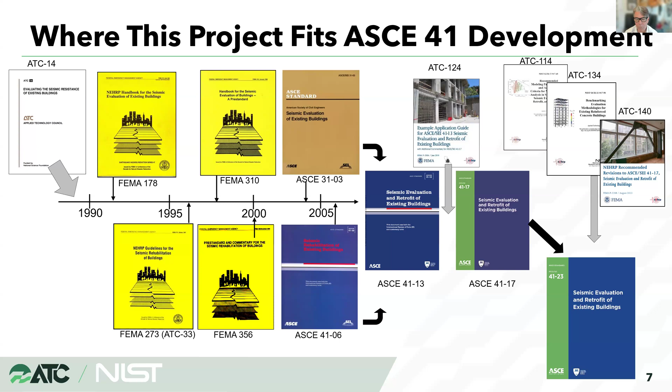I wanted to say that really NIST or FEMA, they don't tell ASCE 41 that you need to use our research information. They just set the table by doing paid research to develop information that can be considered in the standards development.

I'm going to move as quickly as possible to make it in time and leave some time for questions, but I wanted to highlight that what I'll be describing has been summarized very well in the August 2023 Earthquake Spectra, where we had two articles, one of which, on the nonlinear results, was picked for Editor's Choice in that publication. If possible, I'd like for you to look for those EERI Spectra papers, because what I'll be summarizing very quickly today is covered quite nicely in those two documents.

Outline for today: we'll talk a little about how we picked the buildings we were going to look at and how we were going to analyze them, what our approach was, and general observations. Then we'll talk specifically about the nonlinear analysis provisions, then on to linear analysis, and then conclusions and recommendations for future work.

We looked at various assessment procedures, including FEMA P-58, FEMA P-2018, which looks at the collapse probability of concrete buildings, Eurocode to some extent, and the New Zealand guidelines. But our main focus was really on ASCE 41. So while we did look at those other documents and methodologies and have information in our document on those studies, we won't be focusing on that today, again because our main focus was on ASCE 41.

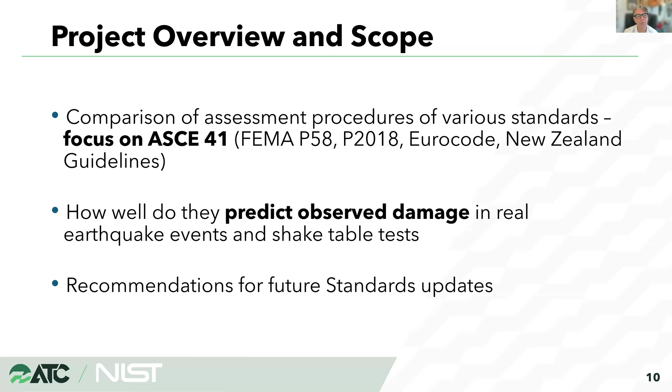The contract had some requirements for what types of buildings we were going to look at. We were only looking at reinforced concrete structures. At least two of those buildings needed to be from the United States. At least two buildings had to be frame buildings, one of which from the US prior to 1980 to cover non-ductile detailing. At least two shear wall buildings, one from the US prior to 1980 as well.

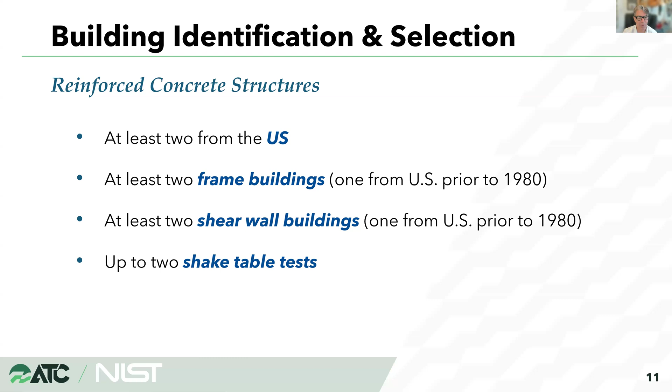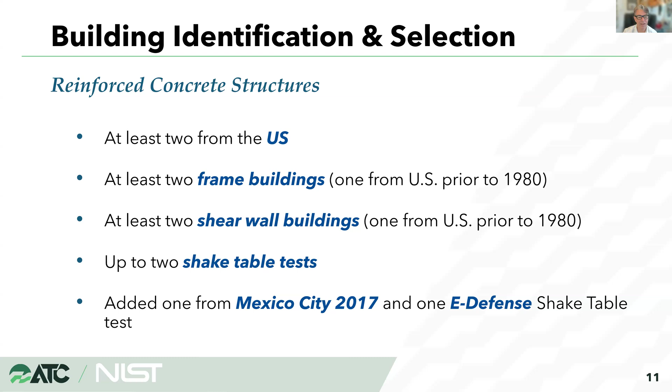Up to two shake table tests were allowed, again for the reasons I stated earlier. Ultimately, we ended up adding one additional building from Mexico City, from the 2017 Puebla earthquake, and one additional E-Defense shake table test. So we ended up having three shake table test studies.

So you'd think there would be lots and lots of these buildings to choose from, but once you started going through these selection filters, it became a little harder to find candidates, and the list becomes a bit reduced. We wanted buildings to be similar to buildings in the United States and not have really bad quality of workmanship, that sort of thing that may affect the results. We wanted the buildings to really be regular if possible, to take out some of the uncertainties related to irregularities.

We needed to have detailed post-event reconnaissance survey data documenting damage. We really wanted to know where the damage was, how bad it was, spaced throughout the building rather than just a few random photos here or there, so that we could tie our evaluation results to what was actually observed. We needed detailed building information, obviously -- drawings, photos, etc.

We needed really close recorded ground motion data, so we didn't want to just estimate the ground motion data. We needed to use recordings that were either directly adjacent to the site for instrumented buildings, or as near as possible for real buildings. And then we have the shake table testing information from the shake table tests, and to the extent possible, having some soil information as needed.

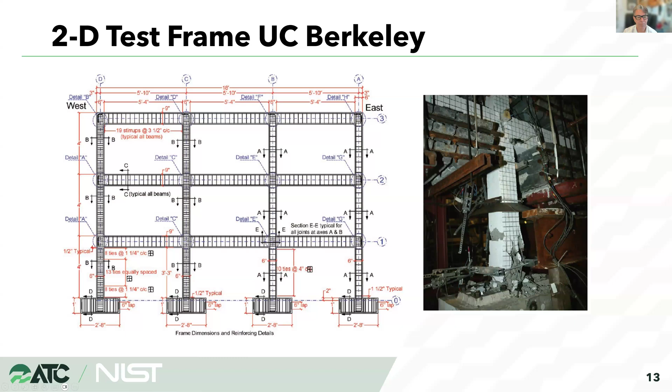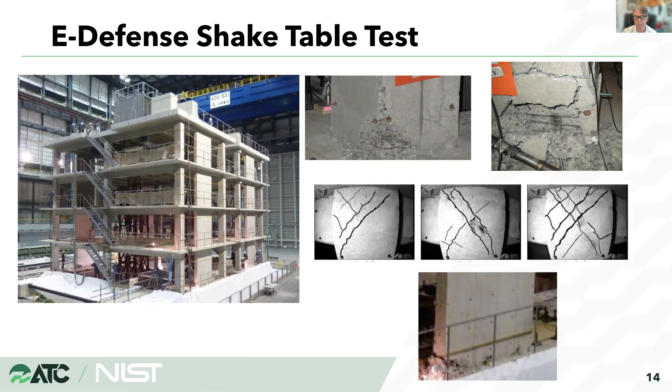The 6-story Imperial County Services building, constructed in '71... actually damaged in the 1979 Imperial Valley earthquake. This building was instrumented with 13 accelerometers spread over its height.

Some significant features were the discontinuous concrete shear walls, visible on the front face, and a step-back of the gravity system creating discontinuities. In the long direction, the building had concrete perimeter frames, while in the short transverse direction it had exterior discontinuous shear walls plus interior shear walls.

You can't really make that out in the photo, but there's another detail worth noting. On the bottom right, you can see the columns had nice tie spacing above the pile cap, but the concrete slab extended so high that it restricted behavior, causing the failure to occur above where the ties were closely spaced.

The Van Nuys Holiday Inn is a 7-story building constructed in the 1960s, designed prior to the 1971 San Fernando earthquake, so it had non-ductile detailing. It suffered minor damage in the 1971 San Fernando earthquake but significant damage to the perimeter moment frames in the 1994 Northridge earthquake.

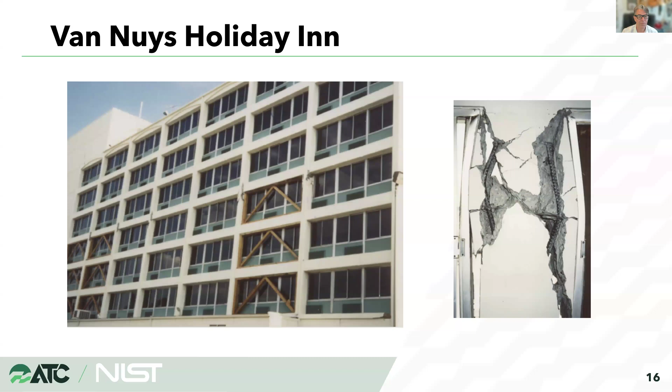The Pyne Gould building was a 5-story building in New Zealand, many of you know this building, constructed in the 1960s. It had minor damage in the 2010 Darfield earthquake but collapsed in the 2011 Christchurch earthquake. This building also had vertical discontinuities in the gravity system.

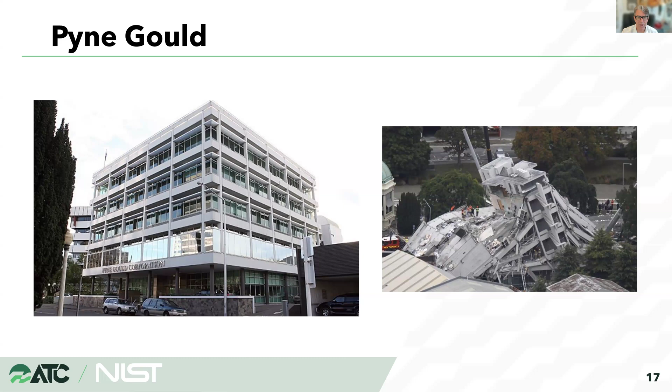The columns step back toward the interior at the lowest level, and during the earthquake that first level was effectively undamaged, with the collapse mechanism taking place above it. The core suffered a compression flexural failure in one of the walls, leading to rigid body rotation and excessive drifts that caused overall collapse.

Another building we looked at is the 3-story Nanhua District Office building, one of three buildings in the area damaged in the 2016 Taiwan earthquake. It was designed in the 1960s with an exterior concrete moment frame and masonry infill, some partial height and some full height, with windows creating captive column conditions in some areas.

Another building we looked at towards the end of the project was the Miramontes building. It's a 10-story building from Mexico City, designed in the 70s, effectively equal to about the '71 ACI code. It was damaged in the 2017 Puebla earthquake. It had shear walls in one direction, concrete shear walls, and then moment frames throughout, lots of CMU infills as well. The damage to this building was significantly to the CMU infill, with very little damage to the actual concrete elements.

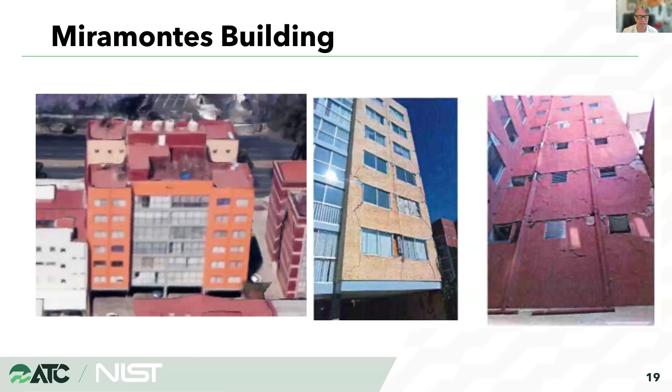The last building study was a 10-story building tested on the E-Defense shake table in 2015 that had concrete moment frames in one direction, and in the other direction, concrete shear walls and moment frames combined. Damage was really high concentrations at the joints, and then some minor spalling of the columns and yielding at the base of the columns and walls. But that damage was pretty modest compared to the joint damage.

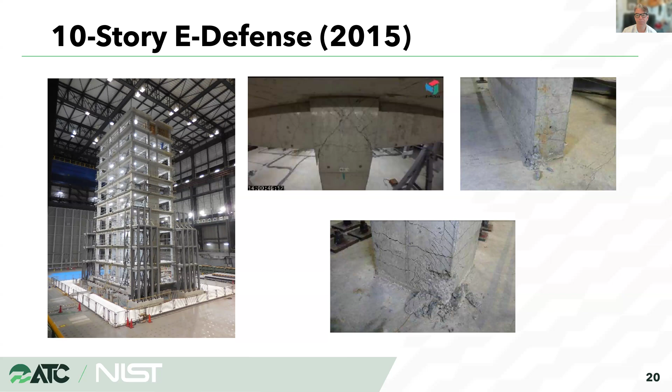Now kind of switching gears to talk about our modeling approaches. Our main theme was to follow ASCE 41 as much as possible. 41 doesn't give all the guidance you need. Sometimes you need to invent some things or think about things and bring in other standards, but follow it as much as possible and really make it a blind prediction. Don't try and look at the damage and then figure out how you're going to model it to emulate that damage. We want to try and see if we could have predicted the damage prior to knowing what it was.

Again, the modeling is similar, but not identical for all buildings. We had different teams working on different buildings, just like you would in the real world. So there were some different choices made by the teams on how they would model things that were mostly similar, but not identical. Our nonlinear models used a combination of lumped plasticity and fiber elements, and we'll talk about those in a bit. The linear models follow the ASCE 41 effective stiffness recommendations, pretty much verbatim without straying from that.

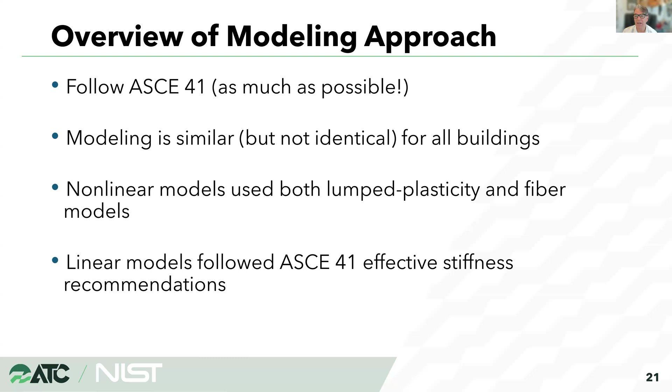So now, how did we compare what we saw in the observed testing or observed earthquake to what our simulations were doing? For the instrumented buildings, we had lots of great engineering demand parameters, or EDPs. So we knew the force in some elements, we knew how far the drifts went, and we knew what the accelerations were on the floor. So we were able to use those directly.

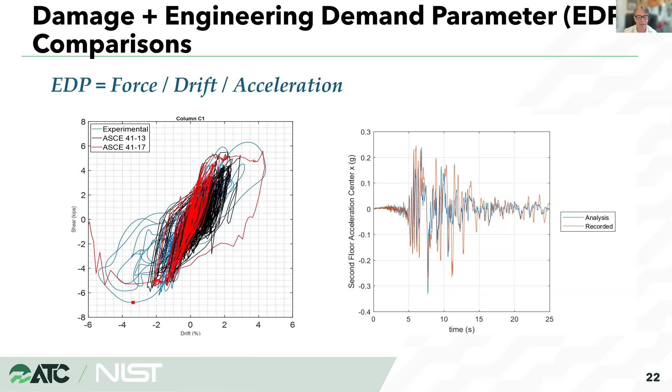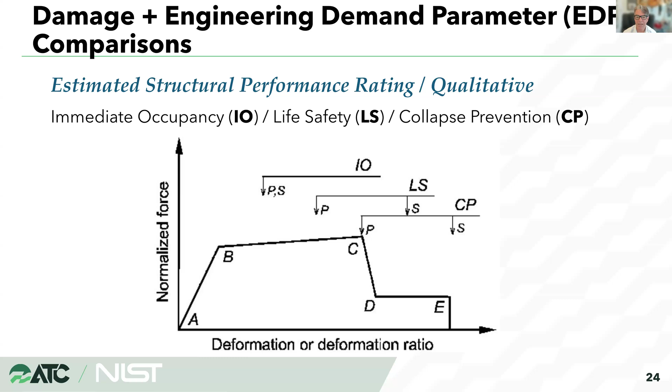When we look at the different acceptance criteria, for buildings where we saw the damage, we said, well, how would we classify this damage? Was it immediate occupancy? Was it life safety, or is it collapse prevention? So what we did is we turned to the table in the commentary of ASCE 41, which describes qualitatively some damage states. For collapse prevention, it shows what type of cracking and where it might be, what life safety might mean as far as damage. So we looked at the damage, and then said which of these categories does that kind of look like it fits into, so we could assign it collapse prevention, life safety, or immediate occupancy.

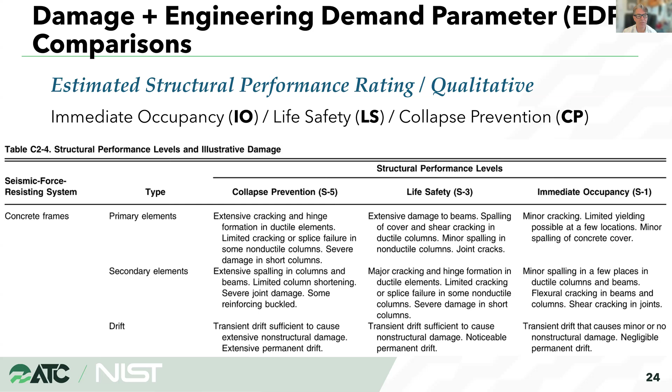When we look at the global response metrics we were looking at, the first thing was, could we identify the critical mechanism? By that, we mean the location of peak response and the mechanism type. Which floor had the highest acceptance ratios and the peak drift-related damage? We wanted to see how well the overall distribution of damage was predicted. So if we got it right on one floor, were we right on all the floors, looking at the overall extent and distribution of damage, rather than just one individual element. And then for the instrumented buildings, obviously we wanted to make comparison of the simulated versus recorded engineering demand parameters.

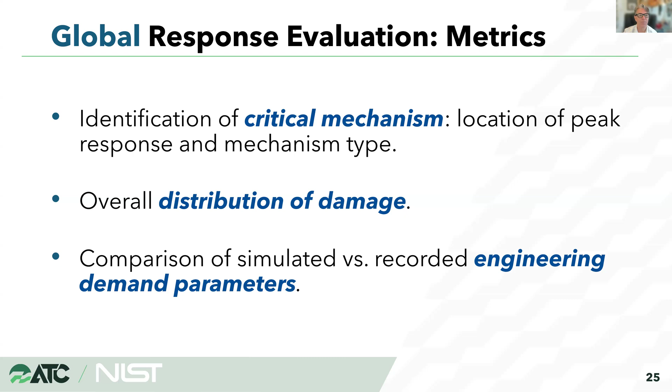So that was kind of globally what we were looking at.

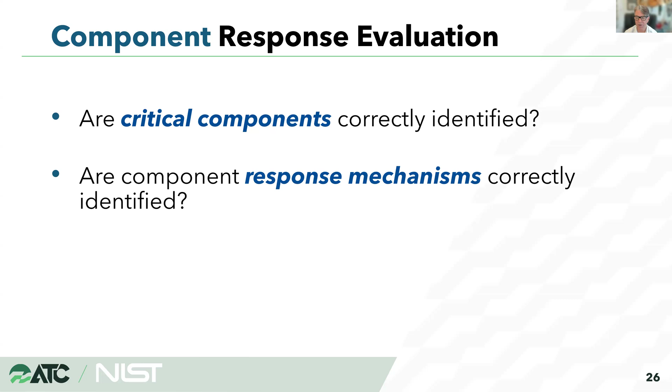On the component side, kind of locally, we're asking: are critical components correctly identified? Are the elements with the highest acceptance or DCRs being correctly identified? Then, are component response mechanisms correctly identified? Are we predicting flexure when it was shown to be shear, or are we getting shear correctly, or was it an axial failure, that sort of thing? And then overall, did we predict the severity of damage accurately?

Okay, taking a quick step here, we're going to summarize the nonlinear results now. I'll present some things quickly showing what our overall findings were, but I'll refer you to the actual document to download and the EER articles for more detailed explanations, because given the time this is going to go by kind of quick, so I do apologize.

Our key questions for nonlinear are: how well do the nonlinear models represent structural response, the location and severity of the damage, the need for retrofit, and where do the ASCE 41 nonlinear procedures succeed or need work? So those are the key questions, summarizing what we've talked about before.

As far as nonlinear modeling approaches, we left it up to the individual teams to decide how they were going to do things and how they would model things, because ASCE 41 provides latitude in that respect.

So we also, just to point out, used two different modeling software. Sometimes it was done with OpenSees, and sometimes it was done with Perform 3D. In some cases we did both, having a Perform 3D and an OpenSees model.

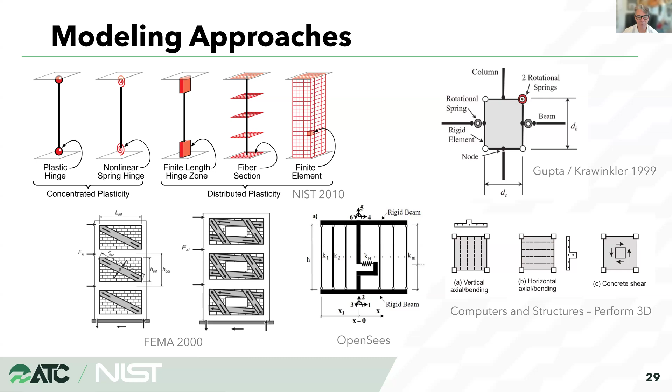All the structures were modeled as 3D with bidirectional ground motions for the nonlinear response history. We used the ground motions that were closest by, like I said. We used 3% damping as specified in ASCE 41, generally consisting of a combination of Rayleigh damping and modal damping.

And again, we really didn't want to try and guess how we should model things based on the damage—we really wanted it to be a blind test. So you can see here, there were a number of different decisions made and taken with nonlinear modeling of elements. I won't spend time on each one, but just wanted to show the wide variation chosen by the teams to do the work.

And then other things we considered are some different variations of linear elements versus nonlinear elements. So for instance, joints, we looked at it both linearly and nonlinearly, and so forth.

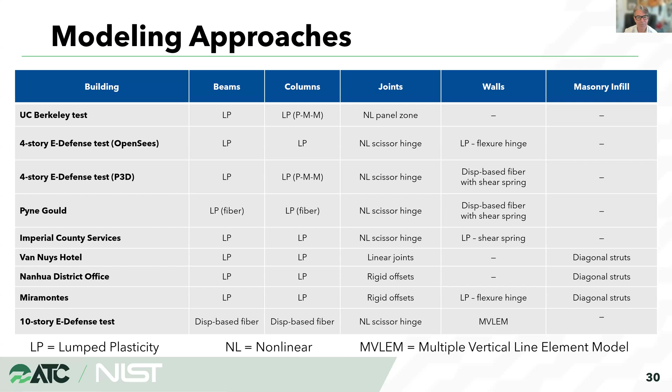When we look at component damage, we follow the ASCE 41 backbone, and the parameter 'a' you see there represents the point of lateral strength loss. Parameter 'b' is kind of the end of the test, or when you might expect to lose all vertical load carrying capacity and lateral capacity of an element.

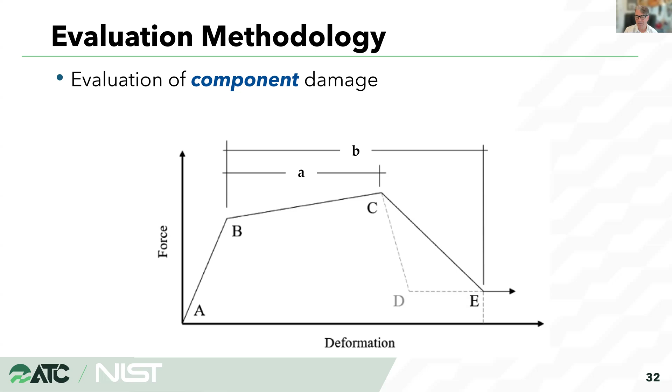And to support these comparisons of where we were on these curves, as I mentioned, we looked back to some tests that have been done, looked at the component damage and so forth, so that we could try to determine where we'd be relative to acceptance criteria for life safety, immediate occupancy, and so forth.

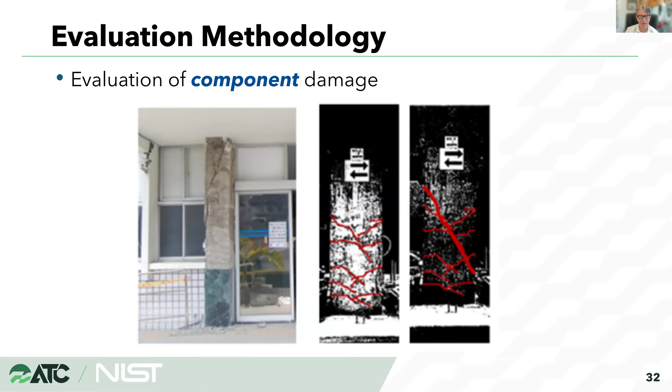Looking at the results now from our nonlinear analysis, looking first at story mechanism comparisons. This is looking at the level of the building that had the highest level of damage or response, and did we capture that level of the building in the general location. A green with an M is a match, and a red with an NM is a non-match. So I wanted to point out a couple of things here.

For the E-defense test, which was the concrete shear wall building, the wall sliding was not captured in our model. ASCE 41-17 really doesn't have any guidance on sliding, and it was not considered as a failure mechanism, so that one was missed. The model actually captured the fact that we had a flexural wall problem, which looks to have instigated the sliding, but we didn't capture the sliding itself.

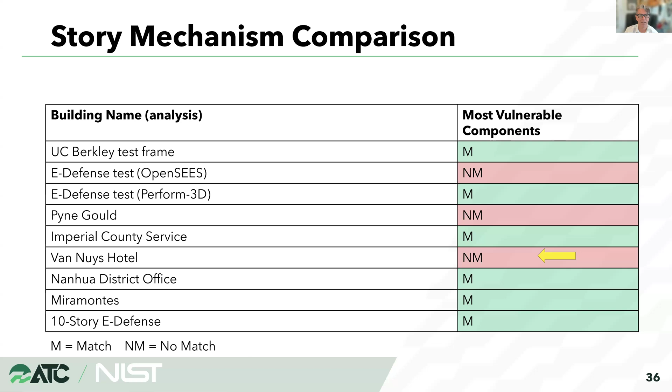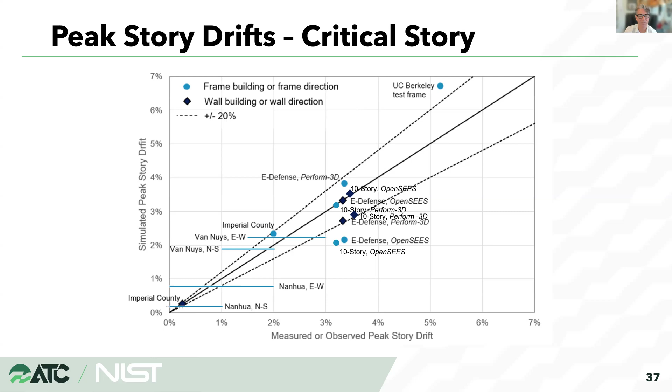So away from the critical story, there wasn't any really great trend, as shown in this plot for the measured buildings—the ones where you had shake table tests or were instrumented. This shows the peak story drifts at all the stories, not just the critical ones, and you can see there's no real great trend either. It's not biased towards being conservative or unconservative with our evaluation simulations, but there's just a lot of scatter. Just take that into consideration.

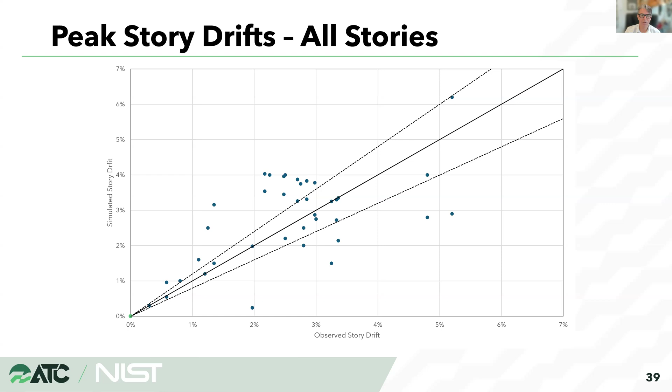Residual drifts, we said let's look at it, but they're really hard to analyze for and get correctly. It really depends on how you're modeling the hysteresis pinch shape and how well your software can capture that. But in general, our simulated residual drifts were almost always much higher than what was observed. So if you're using these for loss estimation, just know your residual drifts probably aren't right, and we couldn't ever have a really good chance of predicting those correctly.

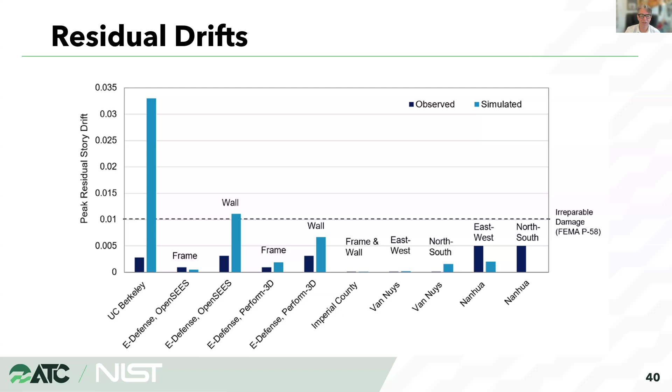In the frame direction, accelerations were generally over predicted, and in the wall direction we under predicted in some cases. Lots of reasons this could happen, but we have some theories for each of the different buildings, though no real clear trend other than a little bit of over prediction perhaps.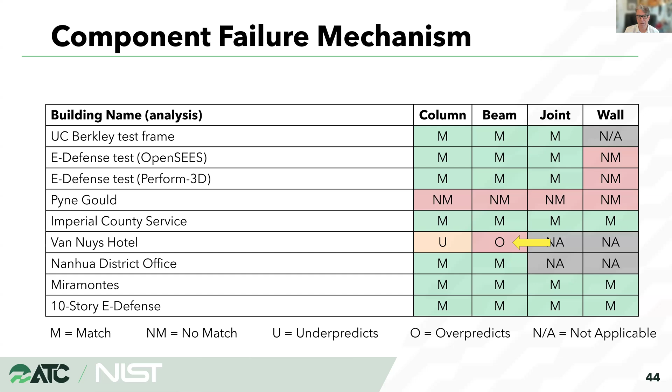Talking now about component damage at the critical location. Looking specifically at the component level, we were interpreting that based on the backbone curves again, so where you would pass the little a point would be where you begin to lose strength, and the B point being where you lose all strength.

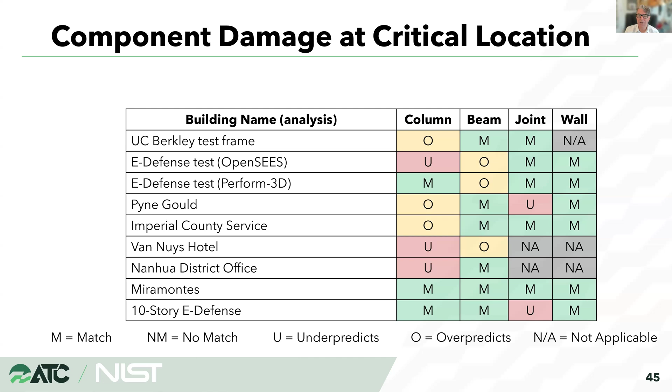The highest variation in damage comparison, as you can see from the table, was really with columns, with about half the models over predicting column damage and about half under predicting. We got the mean right, but we were kind of up and down with the columns. Beams tended to over predict damage, so we're on the conservative side. But this shows we had pretty good agreement for the most part on the damage.

As I mentioned, we were able to predict a failure of the wall, but we missed the mechanism type. The simulated was a flexural issue versus the sliding failure that was seen in reality.

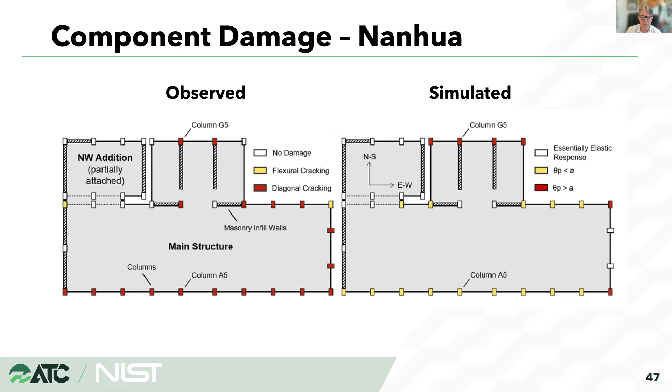Component damage, another example to show you some things here. We had observed damage showing diagonal cracking or flexural cracking. You can see on the left where diagonal cracking is shown by the red squares and flexural cracking predicted by the yellow squares, versus our simulated results, where we had a lot. You can see where we were a little bit less than the A point in some cases, so not showing strength loss. Lots of similar locations, but maybe the damage was a little bit different.

Speaking about component acceptance criteria now. If we're looking element by element at immediate occupancy, life safety, and collapse prevention, all of these buildings really had a fair amount of damage. So when we talk about whether we matched immediate occupancy, life safety, or collapse prevention, we were really focused on collapse prevention, given that these were high damage buildings.

It's hard to say how far above or conservative our collapse prevention simulations were above what it is in reality, because once you're above collapse prevention, it's hard to say how far above it you are. But in general, we matched that, so we were getting components correct for the most part. We did have some under-predictions in a couple of cases, as I mentioned, at the columns and joints at the Pyne Gould building, and then over-prediction of some beam damage as well.

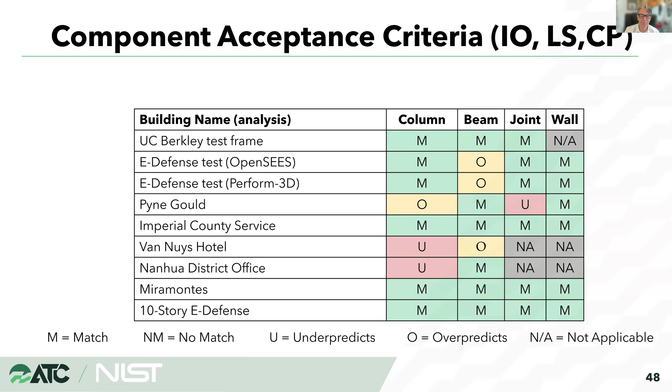Now focusing on global acceptance. Again, most of these buildings were classified as collapse prevention or near collapse prevention, so we were generally getting that performance level correct. However, since most of these buildings were somewhat poor performers, this finding indicates ASCE 41 is good at finding those poor performers, but we really didn't focus at all on immediate occupancy or life safety—that was a lot less of our consideration. We were really trying to see how well it predicted near collapse or collapse performance.

For the Van Nuys Hotel, that was one where we had predicted damage to be in the beams from our models, but it was overall in the columns. So we called that kind of a not-match, because it was really the wrong locations and the wrong elements that were predicted for failure.

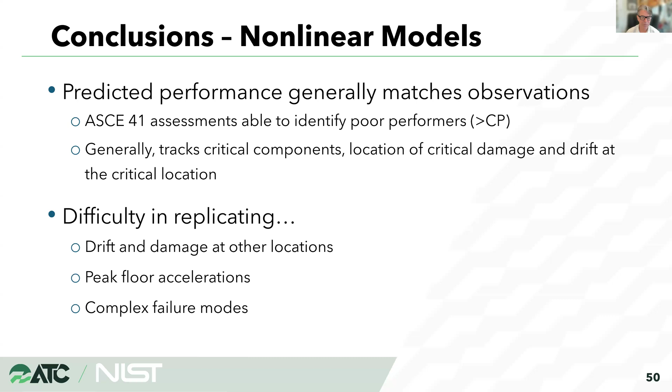Another difficulty we ran into is when adjacent elements have really similar capacities. When joints have shear capacity close to what the beams or columns can deliver, or when beams and columns are closely matched in capacity, the nonlinear model will concentrate damage in the element you selected to have the lowest capacity. You may miss damage due to uncertainty in material strengths, so the nonlinear approach had difficulty looking into those complex failure modes.

So, areas for improvement: some overly conservative beam backbone properties, that has been taken care of for the most part in ACI 369.

Some other things include guidance on axial moment integration and PMM biaxial considerations. You have to select an axial load to use to create your backbones in many cases and your acceptance criteria, and that's dependent on an axial load you don't really know. Do you use the maximum axial load from the analysis, or is it based on a pushover? Some better guidance on that would be helpful for PMM interaction.

Again, improved shear wall modeling behavior - that is being handled in the 369 process, ACI 369.

Improve guidance on calibration of fiber models. So you have a fiber model, say for a wall, column, or beam, and it's pretty easy to get the backbone to match your fiber model when doing a monotonic push. But with cyclic behavior of fiber models, sometimes you see funkier results as individual fibers yield or crush and go through their motion. Does the overall cross-sectional behavior still match the backbone? Because all the backbones are based on overall cross-section behavior, not individual fibers. So giving improved guidance on how to calibrate fiber models so the overall section matches would help.

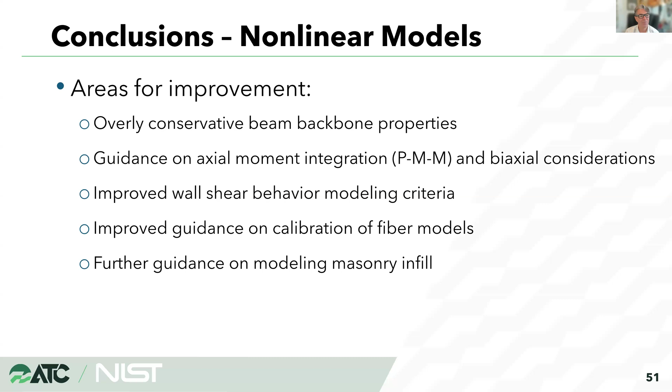Jumping now over into the linear procedures. Linear procedures are used probably most of the time. They're less sophisticated but more accessible. There's an assumption that they're expected to be more conservative, but maybe not always. One thing obviously apparent to engineers is that linear models have no ability to redistribute demand, and finding out what that means globally in a building can be tough - we'll talk about that.

But even when you do a nonlinear analysis, a linear model is generally the first step in doing a Tier 3 kind of nonlinear evaluation.

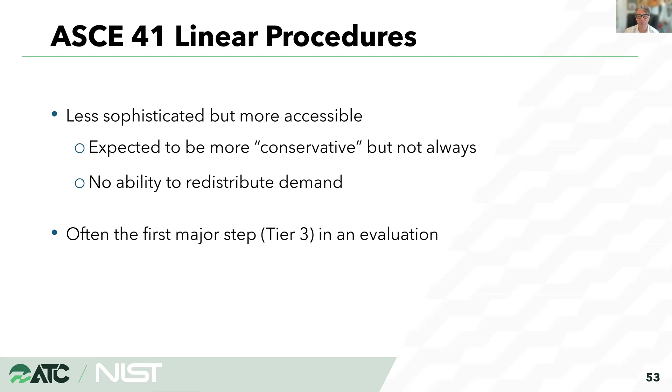Similarly, the NIST document by Harris and Speicher also looked at ASCE 7 designed buildings and how they performed when evaluated with ASCE 41, and found similar trends. I wanted to make you aware of these papers because they also have some great information you might find useful.

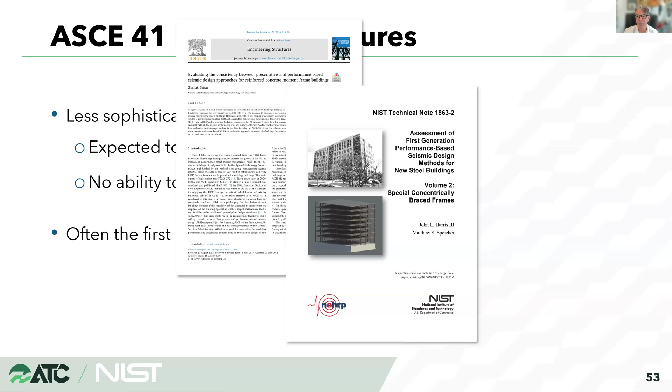So for the linear procedures, again, key questions: Are they really conservative? Is 41 really conservative compared to other methods? Does the real damage match the observed damage, and how do the linear procedures compare to nonlinear procedures? We wanted to look at where the linear procedures obviously succeed and where they need work.

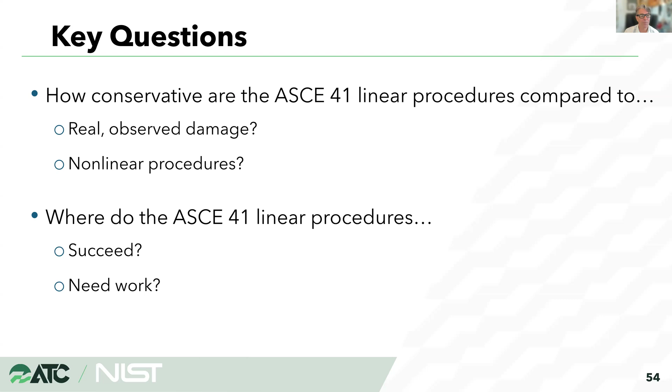To evaluate the component demand to capacity ratios, or acceptance ratios as they're better defined now in ASCE 41, we have the demands due to earthquake and gravity loads, and our component modification factor M. We assumed our knowledge factor was 1 for this study, so whenever there's a kappa K, we always assumed 1, and we use the expected material strengths.

For the force-controlled actions, similarly, we assumed a kappa of 1 and based it on nominal or lower bound strength. We generally had the drawings, and that's what we used for our nominal strengths.

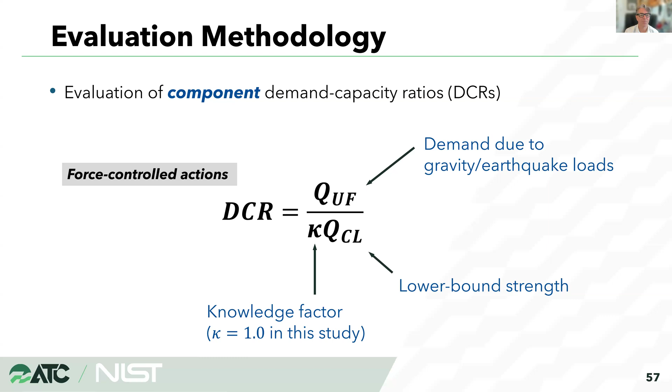We did look at the M factors as well. Their M factors are tied to the same performance states as nonlinear acceptance, but are generally more conservative. Since we're not simulating strength degradation with a linear model, the M factors are really calibrated such that you don't get beyond the point at which strength loss occurs. So your collapse prevention M factor is about here. In general, they're maybe 25% more conservative than the nonlinear acceptance criteria.

One thing I will say is we did look at what if we just increase the linear M factors by 25% to better calibrate them to nonlinear. And we found that actually gave unconservative results. So it's not as easy as saying the M factors might be a little bit more conservative. There's more to it than that when using the linear methods.

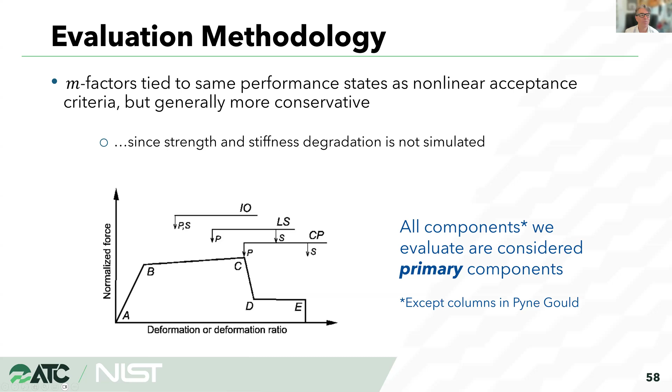We looked at the quantitative comparison between linear and nonlinear - the classifications of immediate occupancy, life safety, collapse prevention, or beyond collapse prevention. And then qualitatively as well. So again, as I mentioned, we looked at that damage and then tried to tie it back to this table in the ASCE 41 commentary, looking at how big the cracks are and how we'd quantify that into collapse prevention, life safety, or immediate occupancy.

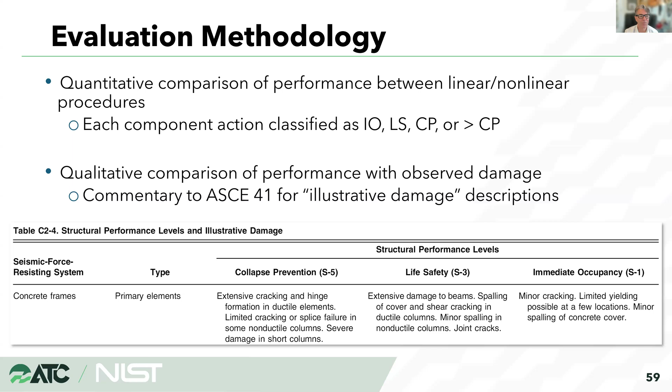Again, just like nonlinear, we looked at global and local response. Looking at the global response is looking at the overall acceptance ratio throughout the structure - how well were we able to predict IO, LS, or CP when we mapped it in that way? And noting that ASCE 41 is really all or nothing with the linear procedures - if you have elements that fail collapse prevention or your selected criteria, that means failure. So we took that into note when looking at our global response.

For the structures that were instrumented, we compared story drifts and roof accelerations. Now that's not really directly part of ASCE 41-17, but we just wanted to see if by looking at that we could find any other trends that may be useful for us to look at.

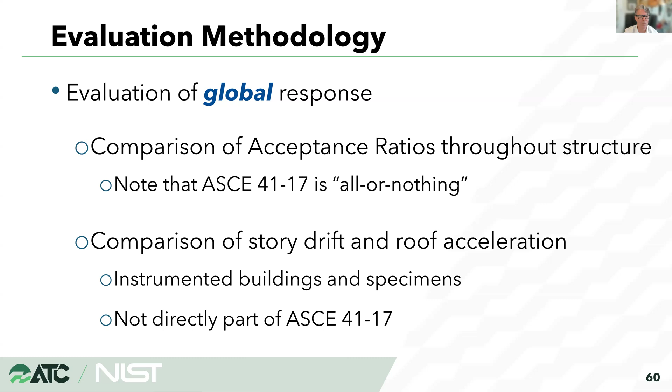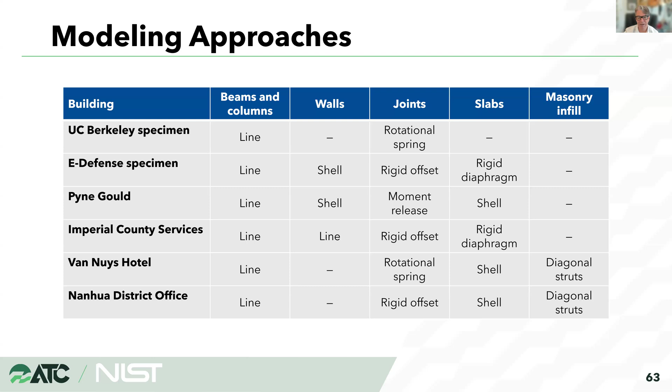Just a quick summary of the different types of elements. Again, linear was a little bit more straightforward - there's not as many selections you have. But some things that are different is sometimes the joints we had true joint flexibility considered, sometimes we used that rigid offset model. So those were looked at a little bit differently in linear, but that didn't have much of an effect on things.

Damping was 5% modal or Rayleigh damping, just like we have in 41-17. We used accidental torsion amplification just to see what that would do as appropriate. For the linear models, we had fixed column and wall bases, essentially with no soil structure interaction.

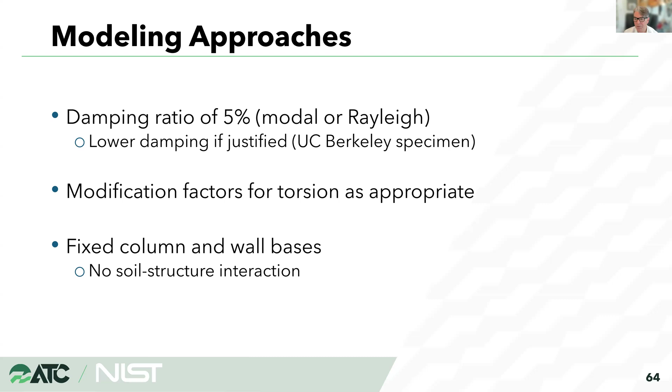One hard part I will say, if you're trying to do a pseudostatic or even a response spectrum for this study, is we have kind of not a design spectrum which is nice and smooth - we have the actual recorded spectrum, which kind of jumps all over the place. So if you're doing a linear model and you have such jumpiness and your period is off by some amount, you could be really off in the demand. So we attempted to try and smooth the spectra, and what we did is kind of a multi-step process.

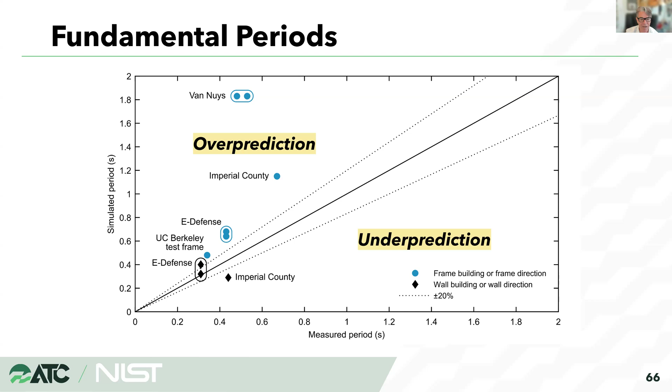Looking at our results, this is just for buildings that had measured period information. Know that these simulated periods use effective stiffness values, and our predictions of periods were significantly higher than the periods of the buildings. Now you're seeing here the periods of the buildings based on ambient noise, the periods of the tested or in-place structures that were instrumented before the earthquake came along and damaged them.

Then if you look at this plot, it shows the shift in periods. There's lots to see here, but what it's showing by these blue arrows is we were able to look at what our nonlinear models predicted as the periods after the shaking, and then looked at what the measured results after the shaking would be. So you can see that shift. Generally, our simulations produced higher periods than the measured periods, with a couple of exceptions that are described in the document.

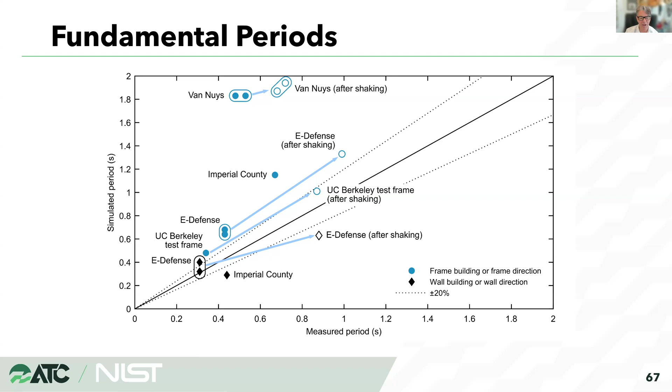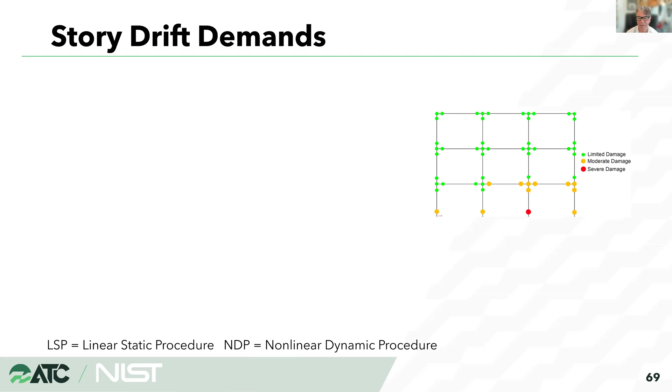I'll show one thing here for the UC Berkeley building - when looking at the damage, you see it shown on this figure. Green dots represent what was actually observed in the field as limited damage, orange dots show moderate levels of damage, and red dots show severe damage. That red dot is there at the critical story.

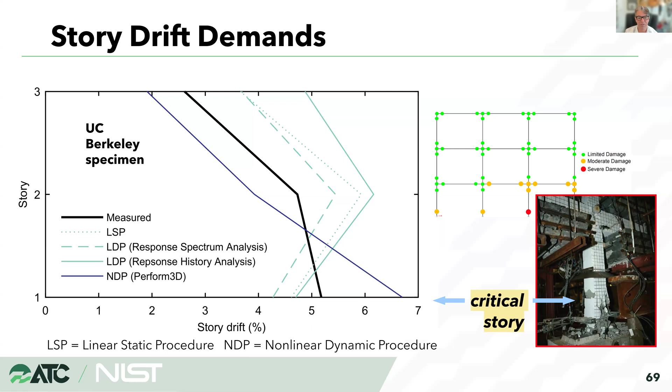Looking at the drifts, we got them pretty close. The three green lines are the different linear methods compared to the heavy black line. Our drift was a little lower than the measured drift at that critical story, but then we had big levels of over-prediction of drift away from the level that had the critical behavior - sometimes up to 90% over-prediction.

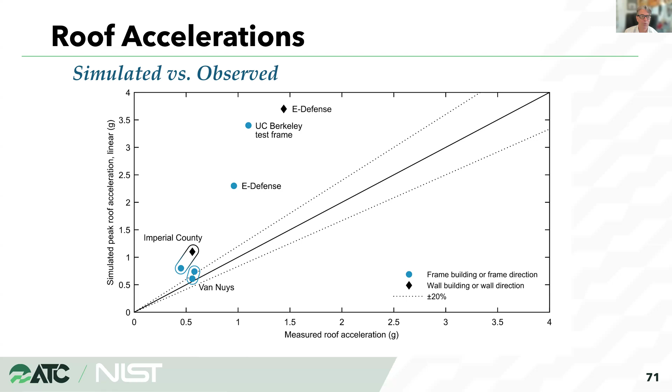Accelerations are pretty much useless from the linear models unless the building remains totally linear. We're not giving you any new information here, but we did measure them, and we significantly overestimate the accelerations in the building with a linear model. We just don't have a way to capture the mechanism formation and how that might lower the demands. Also, our stiffnesses are chosen based on an effective stiffness value that could vary up the height of the building in reality, but you pick one for everything. So we were really off with the roof accelerations, with consistent over-prediction.

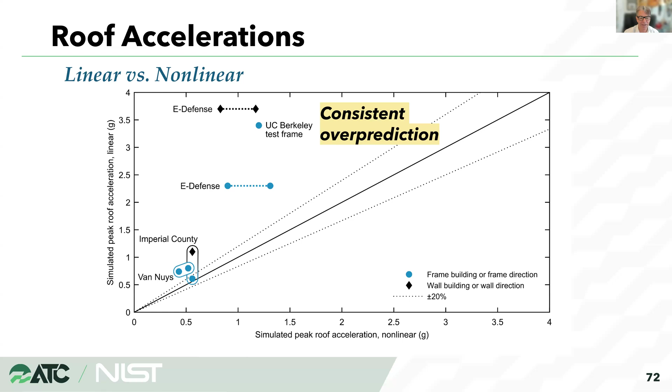When we compare linear to nonlinear, we see that same consistent over prediction for accelerations, as I mentioned.

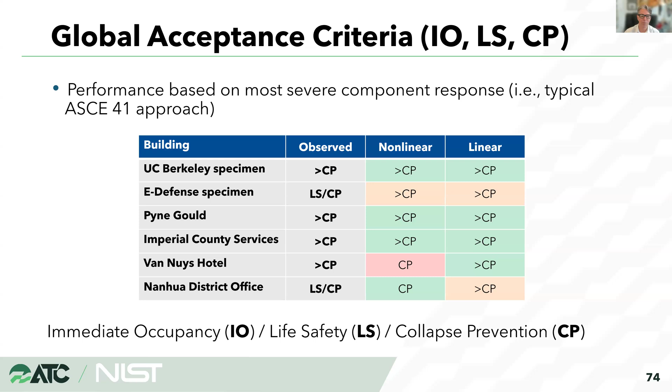Kind of globally, what does that mean? Well, not a lot to be told here, because if we're constantly matching or over predicting, as you can see with the predictions in the far right column of the overall building - we call this building collapse prevention versus just component - we were pretty much matching or over predicting in all cases.

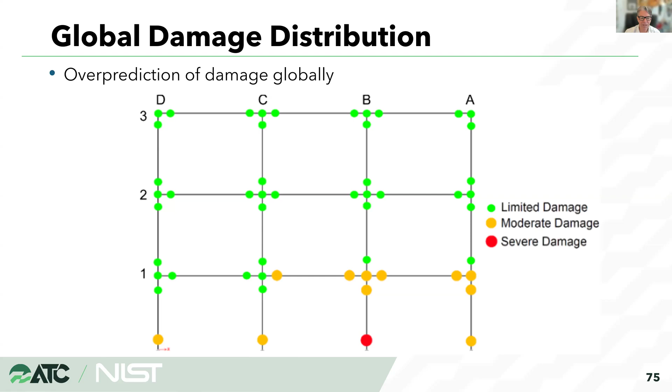So in general, it was really hard to get a global prediction with the linear on the overall level of damage throughout the entire building. So we did look at 6 buildings with the different modeling approaches and the different linear methods. Again, these were all heavily damaged or collapsed buildings, so it's hard to really say for sure what would happen at other levels of damage or at immediate occupancy or life safety.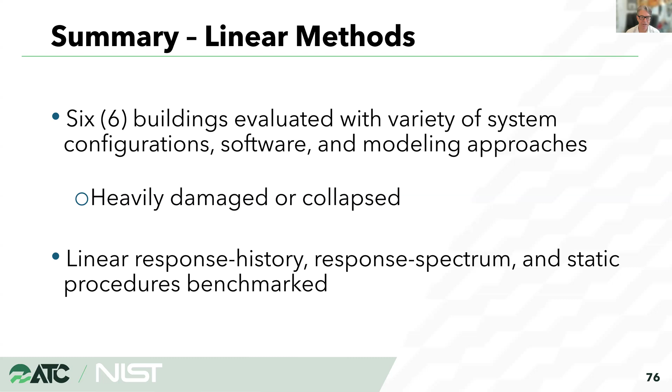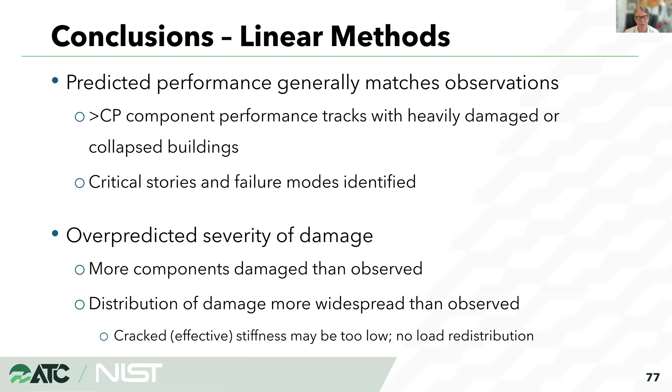Our main conclusions are that the predicted performance generally matches the observation. So the components that are greater than CP performance track with the heavily damaged elements in the building. We're generally finding those critical stories and failure modes with the linear methods, but overall we over predict the severity of damage - more components being damaged than were observed. The distribution is also more widespread with those linear methods. That could be due to different crack stiffnesses and obviously the non-consideration of a formation of a mechanism.

There's no significant difference in the outcomes between the linear procedure types - static response spectrum and linear response history were all pretty similar to one another. And then overall, both nonlinear and linear were able to reliably identify the main vulnerabilities, the most critical. Nonlinear again provides a better understanding of the damage distribution and the global mechanism. Linear procedures could really be enhanced with some consideration of a mechanism analysis, and that's something we're considering for future work on how you might do that, similar to what's done in FEMA P 2018.

Some general observations and key takeaways - I'm summarizing and kind of saying things again here - but linear and nonlinear were able to predict the correct mechanism location. We got the right story for the most part. Linear generally overestimates the overall damage distribution. I don't think that's a surprise to anybody, but the extent was confirmed in everything we did.

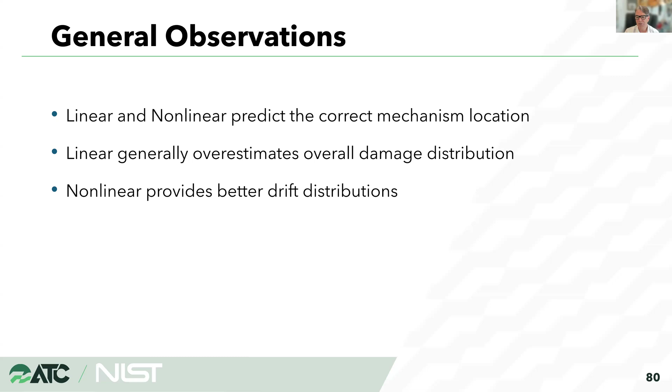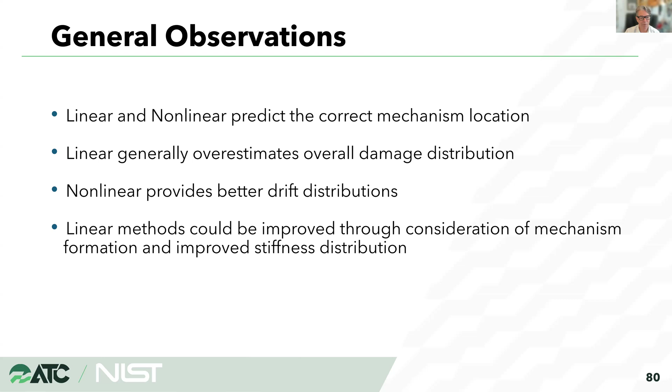Nonlinear provides better drift distributions over the height of the building, which could be important when you're trying to identify specific vulnerable components which are in need of retrofit design. That's going to get a much better picture from the nonlinear analysis methods. Again, linear methods really need to have some way of considering a mechanism formation to be able to limit forces elsewhere in the building.

The key positives are the location of critical damage is well located, and the drift at that critical location is pretty well predicted by both methods. The overall performance of the building is pretty good - it could be better. We did have trouble with some mechanism predictions, as I mentioned, beams versus columns versus was it the joint or wall sliding. So we generally had the right location and concentrations of damage, but the actual mechanism prediction could be better.

The drifts away from critical locations could be improved, and that global level of damage with the linear methods leaves something to be desired. The distribution of other drifts throughout the building could be improved.

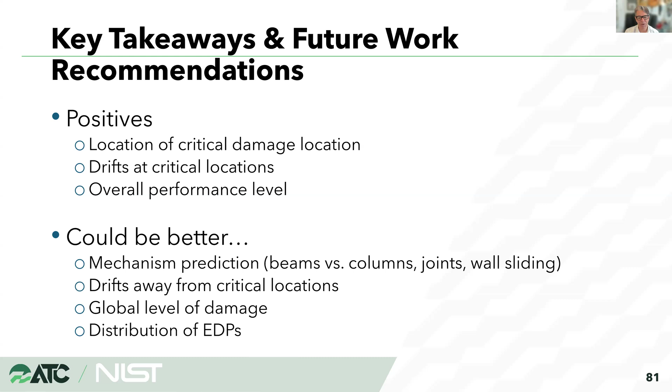Looking at recommendations for future work, beam modeling has been improved with ACI 369-22, and wall sliding is now included in ASCE 41-23 and ACI 369.

Joint modeling is still a tough one. When you look at the strengths, you have a gamma factor, like 20 root F prime C, depending on the joint. It's one number - you pick 20 or 15 or 10 or 8. If you're off and that becomes your mechanism, you could be protecting elements that may not really be protected. So joints could probably use some improvement.

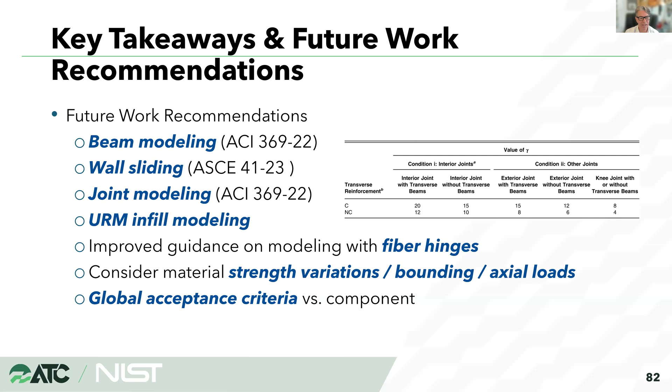We want improved guidance on modeling with fiber hinges so they can be calibrated better to overall member behavior. We want consideration of material strength variations, bounding, and axial loads - I'll talk about that in a second. Also, 41 is really an all-or-nothing component acceptance criteria. If an element fails by the letter of the code, you fail that - but is that true for the building in total? So global versus component acceptance is a recommendation for future consideration.

A couple quick slides to talk to those points. For instance, on the Van Nuys building, when we were predicting beam damage versus column damage, the real damage was in column shear cracking and some joint cracking, whereas the model predicted lots of beam damage and almost no damage to the columns. So is that a material issue, or could there be something else?

One theory we're looking into is that as these beams yield in flexure, they elongate. As a beam elongates due to nonlinear behavior, the entire frame wants to get longer. So for buildings where a slab restrains that movement, that could produce axial loads in the beams - you see a P-M interaction diagram here on the right.

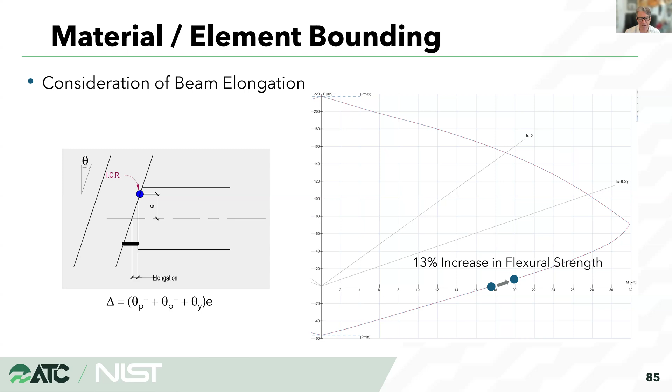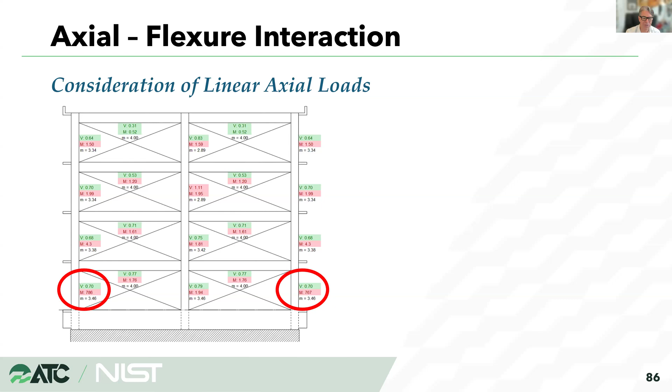Flexural and axial interaction with linear methods gets really tough. For example, in this frame, the column at the bottom right and bottom left had that 700 - those numbers in red over 700 for flexure are due to tension. So how do you treat elements that go into tension with linear methods? It's hard because of the shape of the P-M interaction diagram, whereas the nonlinear model showed those elements having very little damage, not a DCR near infinity.

You start with an axial-flexure interaction diagram - what forces do you use for that? If you start with results right out of the analysis, you could be really far outside the PM interaction diagram, especially on the tension side. What does that really mean for linear methods?

Further, you have to know what axial load you have in the element to enter the table and pick an M factor. What axial load do you use - is it the tension load or the compression load? Some increased guidance on that is important. Also, you need to know the shear capacity versus shear demand, and what axial load to use for the column when looking at shear demand - what is its flexural strength? You need that axial load to pick the shear. That's another area in need of improved guidance for linear methods.

These interaction issues are really hard when you're using fictitiously high forces. Now thinking about component versus global acceptance.

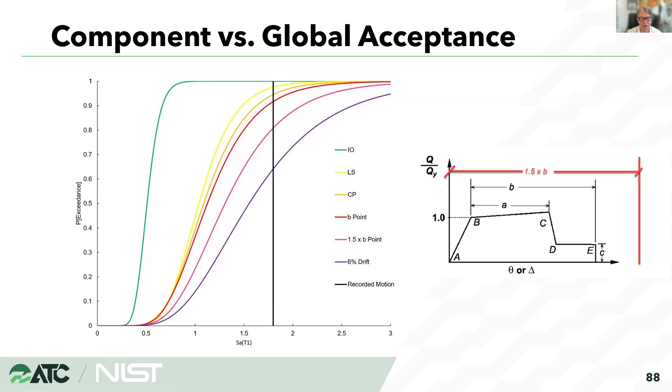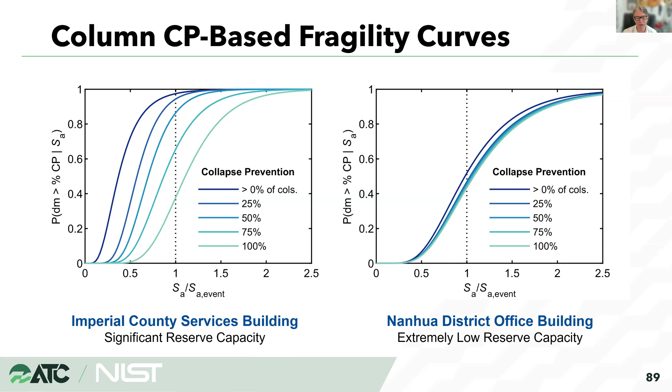It's really hard to figure out how to quantify that, but that's something we're looking at. Sometimes you have a really robust building, such as the Imperial County, where the fragilities show low levels of columns going, and then you have significant reserve capacity before all the columns go, versus a Nanhua type of building where kind of everything goes at once. So maybe then looking at one element does work, versus Imperial County, where you may get a false, overly conservative impression of what's going on.

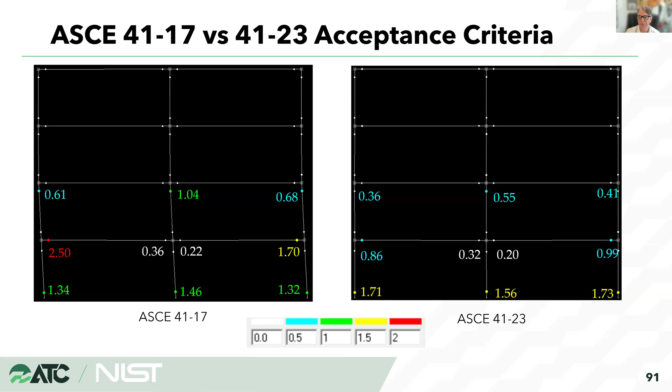And then there's continued improvements with the acceptance criteria. Just an example here for the beams, ASCE 41-17 versus 23, and here's the backbone. So things used to be very conservative with the blue, and now they're heading towards the black. And those are being improved for all elements through various things.

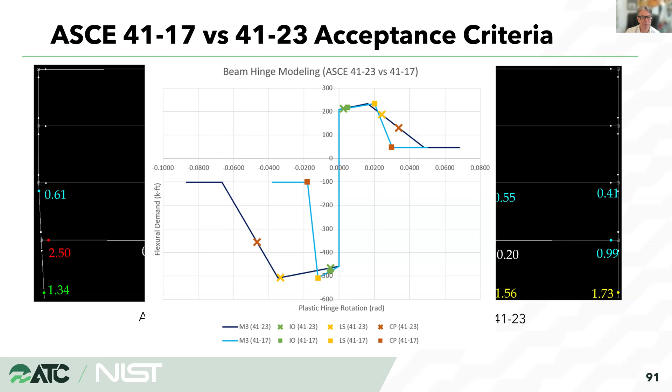So I probably went a little long. I went through things really fast, but I wanted to leave the remaining time for questions. Maybe Justin, if you can let me know what I messed up, if somebody can tell me that, or give me any questions, I'll try and do my best to answer it. Again, I apologize for the speed at which I'm going through this, but we had a short time and I wanted to cover a lot of ground.

Great job, Russ. Nothing about you messing up. We have a lot of really good questions. We probably won't be able to get through all of them, just given the number, but let's give it a shot.

Okay, first one: the overall takeaway from the comparisons using nonlinear models seems to be that the predictions generally matched and we're not biased towards over or under prediction. This seems counter to a commonly held belief by practicing engineers that our models over-predict damage. What are your thoughts on this?

So I think for the examples we looked at, what I stated was true. I'll re-emphasize the fact that we didn't look at buildings that didn't have a lot of damage. Imagine you get a 6.0 earthquake that's kind of near your building that had a little bit of damage in reality, but your nonlinear model would show lots of damage. We didn't look at those specific types of examples, so I don't think I can conclusively say that holds true for those other performance levels. Some of the ATC projects that are ongoing now are looking a bit more at that, but for this project, I can't say that is generally true or not, because again, we were limited to buildings with a lot of damage already. So they showed collapse prevention, and so did our model. I don't know that I can speak to that.